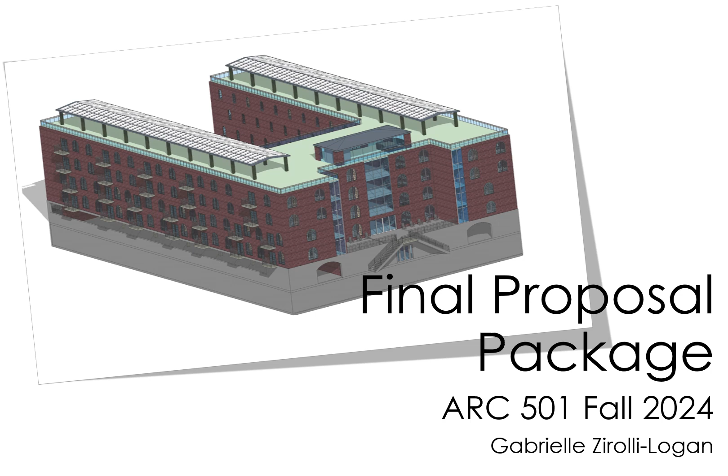For this project, we were tasked with working in groups to design a community of residential buildings in a Los Angeles neighborhood with a focus on affordability and sustainable design. In order to succeed in the design of our community, we first need to learn about the neighborhood and city we would be bringing this community to.

In summary, Los Angeles is the second most populated city in the United States. Its largest industries are oil, manufacturing, and motion pictures. There is a large Latino population in the area. There is a history of inequality and gentrification, and the city is seeing an increase in high-density housing to accommodate growing populations.

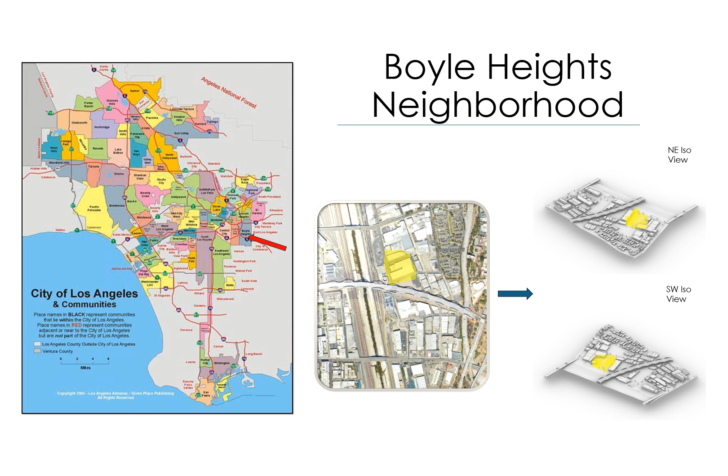Our site is located in the Boyle Heights neighborhood. Boyle Heights is at the far east side of the city, just north of South and Southeast LA. Our site is located along the east side of the Los Angeles River between 4th Street and 7th Street bridges.

With the research that our section conducted, there are some important key takeaways to consider when designing our communities and residential buildings in the Boyle Heights neighborhood. Housing has been and continues to be an issue with affordable housing hard to come by, gentrification still driving locals out of the area, and there is a large homeless population in the area.

But development is often frowned upon by locals as they perceive it to be a threat and it disrupts community functioning. Green building is becoming more important as climate change becomes more of a prominent issue, energy and water costs rise, and as the health of the environment is more valued by the younger generations. Additionally, unity in the neighborhood is lacking, and Boyle Heights does not have much green space.

Keeping these key ideas in our research in mind, some recommendations for moving forward in our designs include repurposing existing buildings so as to cause less disruption to the neighborhood, integrating mixed-use components to balance the need for recreational, commercial, and residential spaces, implementing green building elements and technologies in order to save on energy costs, save water, and contribute positively to the health of the planet, and adding community amenities and shared spaces to foster a feeling of unity, and keeping the locals in mind when it comes to developing, getting their opinions, and respecting their neighborhoods.

I looked at some precedent projects throughout the course and took away some good information and inspiration. The Macallen Building in Boston, Massachusetts is an apartment building that holds a LEED Gold certification for its superior sustainable design.

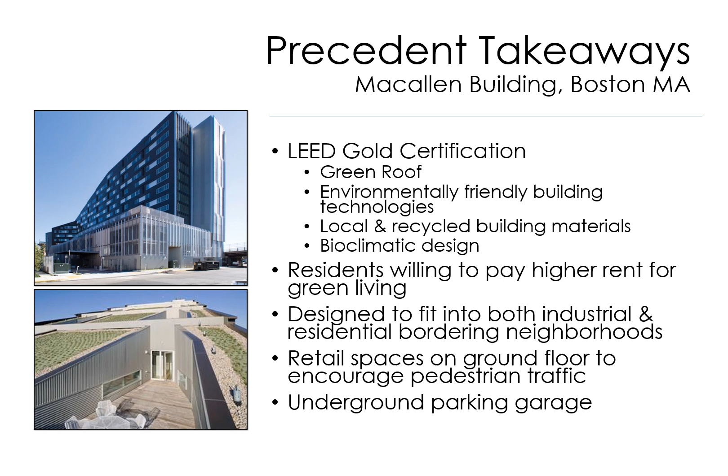The SIX Veteran Disabled Housing in LA has a main focus on affordability and sustainability. The architects let the structural engineer and contractors take the lead on designing in the most cost-effective way. They used passive design strategies like natural ventilation for cooling. Other green aspects included a green roof, solar panels, and low-flow water fixtures. They also prioritize community elements over private areas to encourage socialization.

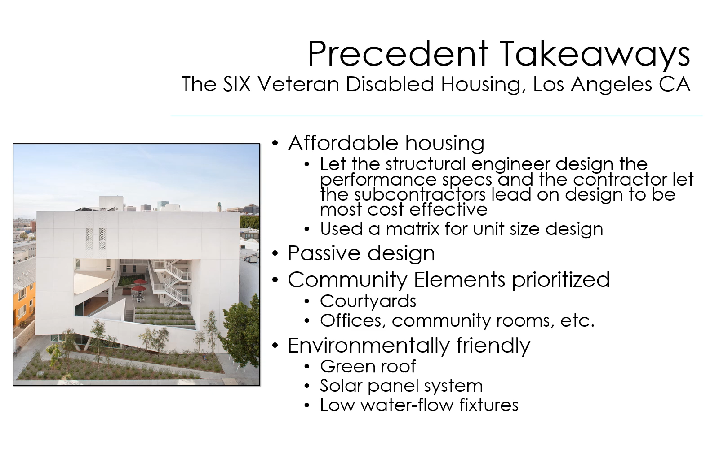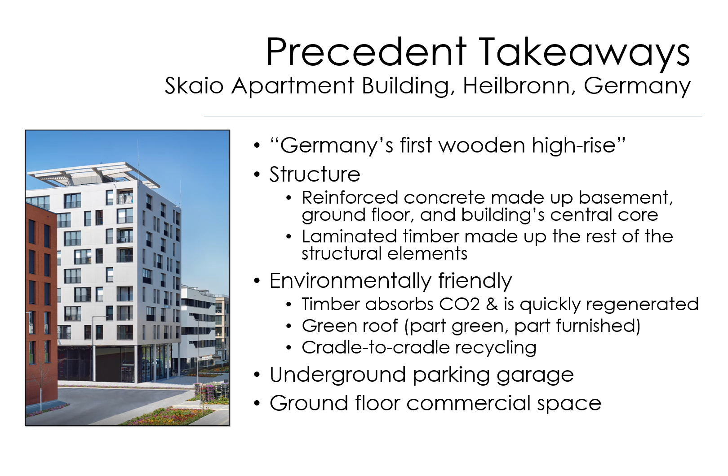The Skaio apartment building in Heilbronn, Germany is an impressive timber structure. It is Germany's first wooden high-rise, with its structure largely made of laminated timber. This also makes the building very environmentally friendly with its ability to absorb CO2. Skaio also has a green roof, underground parking, and ground floor commercial space. You'll see many of these ideas incorporated into mine and the community's design.

Our group chose Site 2 in the Boyle Heights neighborhood, which you can see highlighted here. We chose this site for its access to Viaduct Park to the south and for its size, as we would be adding 5 residential buildings to the site. I have Zone 3 on the site. It is 36,955 square feet, and my plan was to design an apartment building focusing on sustainability and affordability.

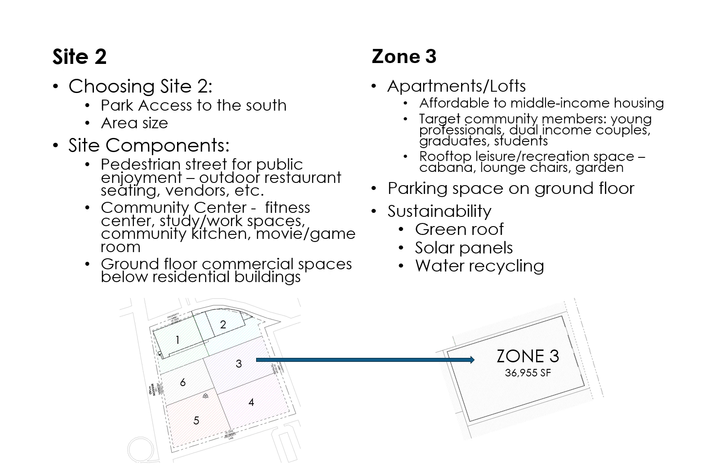Here's our group's master plan for the community, which we named Viaduct Village. The entirety of the site is 5.5 acres, which required 167 units. My building alone has 56 of those units. Here you can see the planned site with our master plan incorporated for context with the surrounding neighborhood.

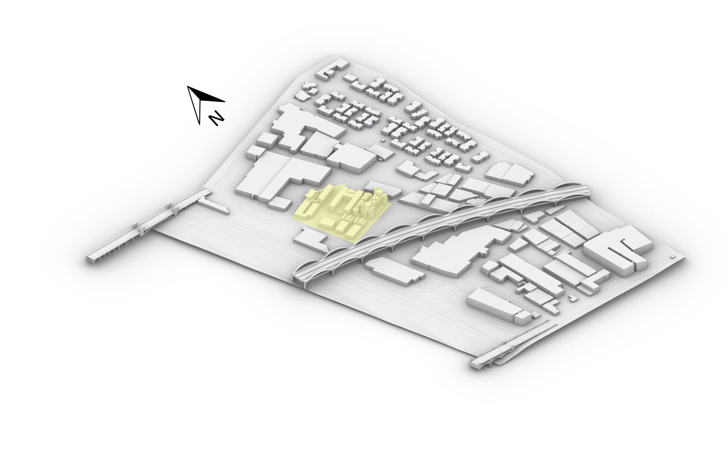The site can be accessed by both pedestrians and vehicles. The secondary street on the east side of the site was previously pedestrian-only and is being converted so that vehicles may access the parking garage on the ground and basement floors of my building. There are 2 pedestrian streets going through the site, which will also be utilized by emergency and service vehicles so that each residential building is accessible.

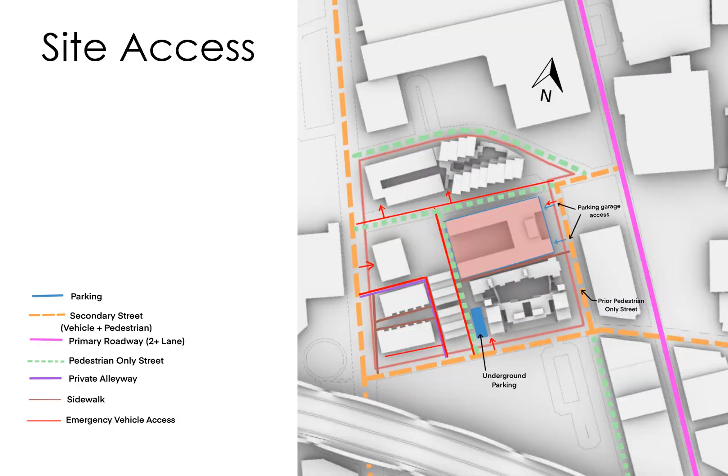Some factors to keep in mind when designing on the site are its proximity to the LA River, the winds from the east and west, and the warm, dry climate.

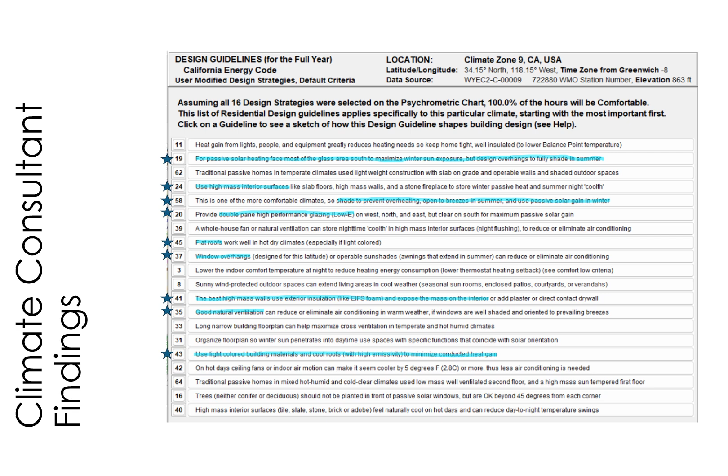I used the Climate Consultant program to further look into the site's ecological factors to consider, and some guidelines the program suggested were southern sun exposure, high mass interior surfaces, shaded areas, double pane low-E windows, flat roofs, natural ventilation, cool roofs, and more.

I went through several massing ideas at the beginning of my design process. I wanted to maximize the amount of units in my zone, incorporate a courtyard for the residents, and keep the design relatively simple in order to keep construction costs down. I ended on this modified H shape.

I think it is a simple but interesting shape and hope to add design interest with building materials and window shapes. I also went back and forth on how to use the bottom floors of my building and settled on a parking garage for both the residents and the public visiting the community.

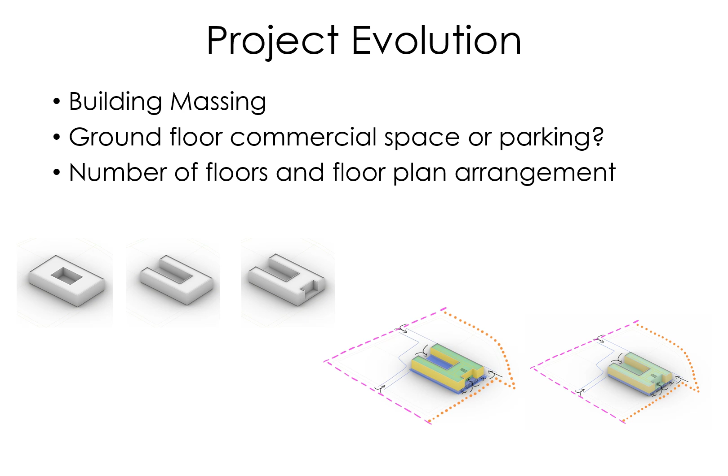I also added floors to increase the number of units and went through several floor plan and unit designs throughout the process. I named my building Urban Eden Residences, sustainably designed, urbanly inspired.

Getting into the layout of the building, I designed a ground floor and basement parking garage. These hold a total of 91 parking spaces. There are 2 pedestrian entrances to the west and a vehicle entrance and exit to the east.

The basement is accessed via 2 elevators and sets of stairs at the northwest and southwest corners, and the ground floor has an additional staircase and cargo elevator at the front of the building to the east. The ground floor also has a storage and mailroom for residents.

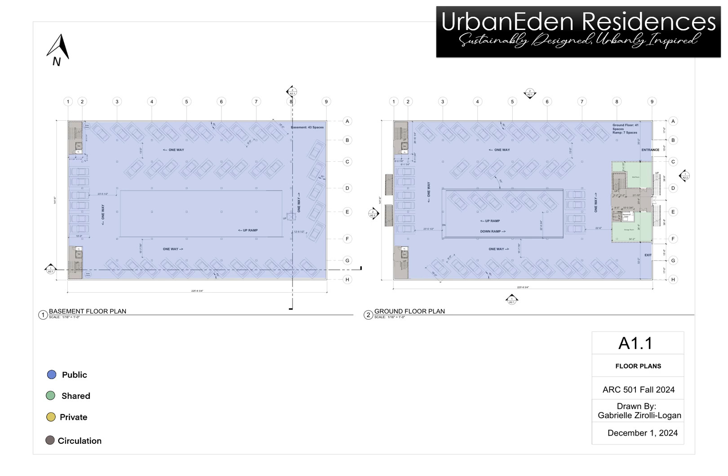Level 1 is accessible via both the interior staircases and elevators, as well as 2 exterior staircases at both the east and west of the building.

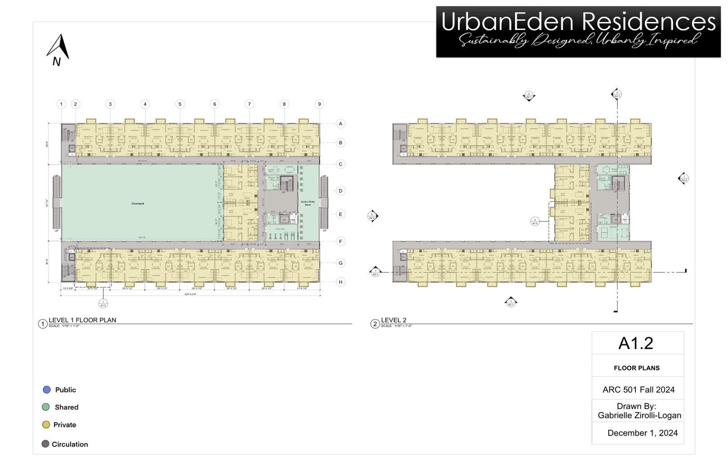The interior floor plans of levels 1 and 2 are identical, with 14 one-bedroom, one-bathroom apartments and 2 two-bedroom, one-bathroom apartments on each level. Each floor also has a men's and women's bathroom, as well as 2 additional common spaces.

Levels 3 and 4 also have identical floor plans, but with 10 two-bedroom, one-bathroom apartments and 2 three-bedroom, two-bathroom apartments each. The core of the building, with the elevator, staircase, restrooms, shared spaces, and 2 two-bedroom apartments, is identical on all 4 residential levels.

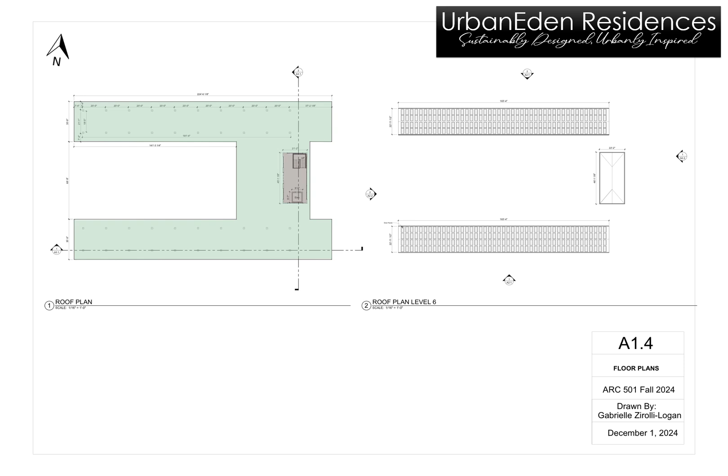The roof is accessed via the core elevator and staircase and is a shared space for residents to lounge, garden, and socialize.

Here are some enlarged plans of the 4 different types of units in the building. Unit Type 1 is a 1-bedroom, 1-bathroom, 926 square foot apartment. Unit Type 2 is a 3-bedroom, 2-bathroom, 1,730 square feet.

Unit Type 3 is a 2-bedroom, 1-bathroom, 1,222 square feet. And Unit Type 4 is a 2-bedroom, 1-bathroom, 1,101 square feet. All unit types have balconies, with the exception of the 2 Type 4s on level 1, which instead have direct access

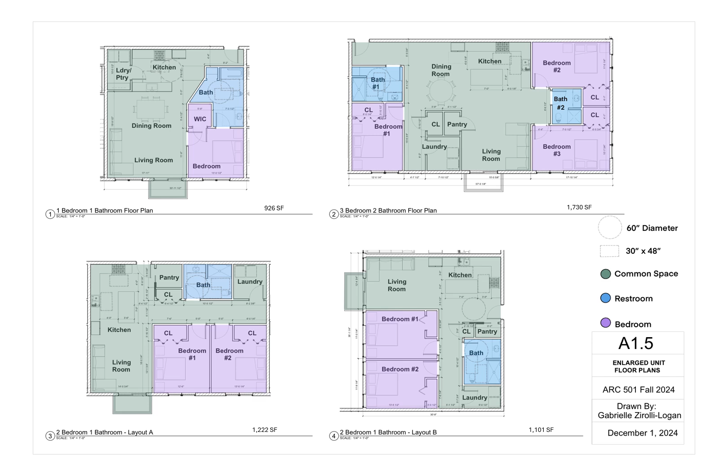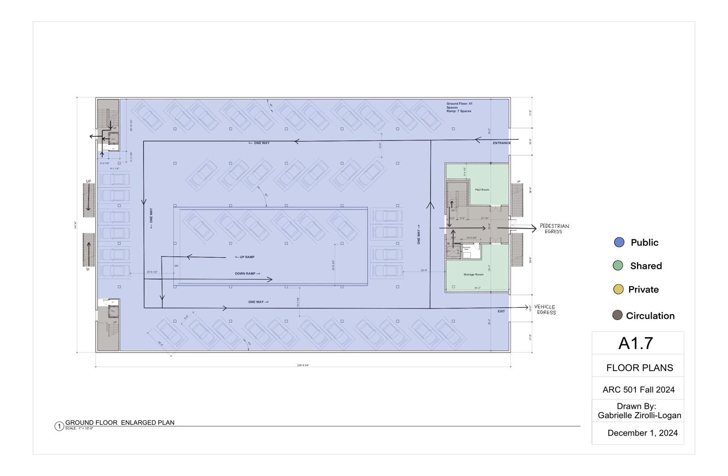Next, I further identified the different unit types on the floor plans. You can see the 1 bedrooms colored in yellow and the Type 4 2 bedrooms in red.

I also identified the egress routes on each floor. Level 1 has 2 exit doors into the courtyard to the west and the main doors on the entry deck to the east. Residents may also travel downward to exit via the ground floor.

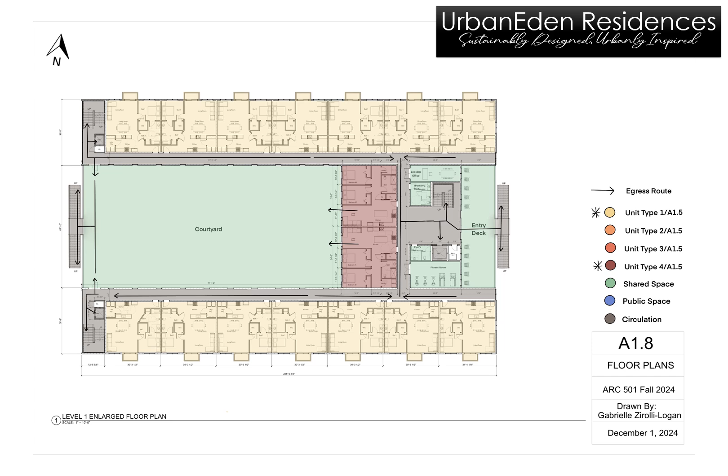The shared spaces on this floor are a leasing office and fitness space, in addition to the 2 restrooms. There are also 3 mechanical closets on each level, shown in white, with vertical shafts for mechanical and electrical system components to access each floor.

Here's level 2, the same floor plan as level 1 with the exception of the exterior access points. The shared spaces on this level are a resident lounge and a game room.

Level 3 has 8 Type 3 units, 2 Type 2 units, and 2 Type 4 units. The shared spaces on this level are a work-study space and a media room.

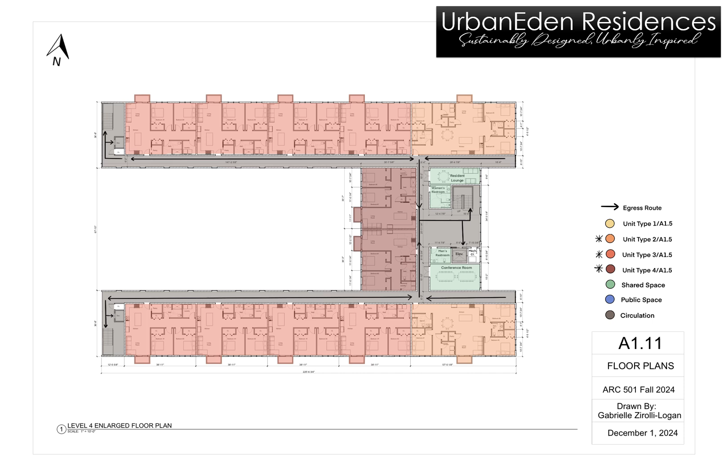Here are some elevation drawings of the building.

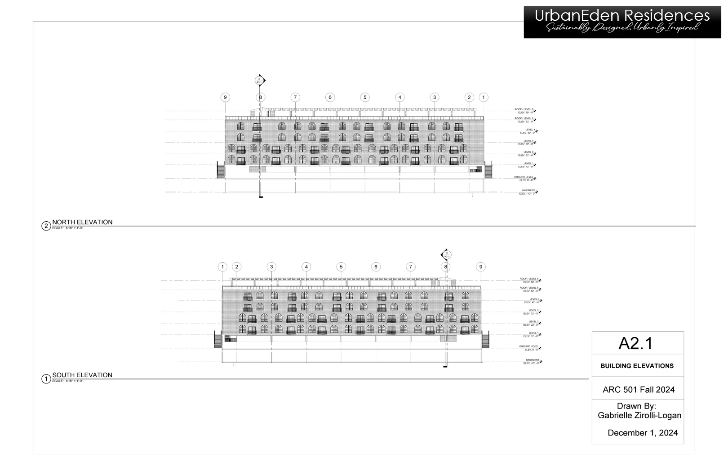Next is a southeast isometric view of the building design, and a northwest isometric view.

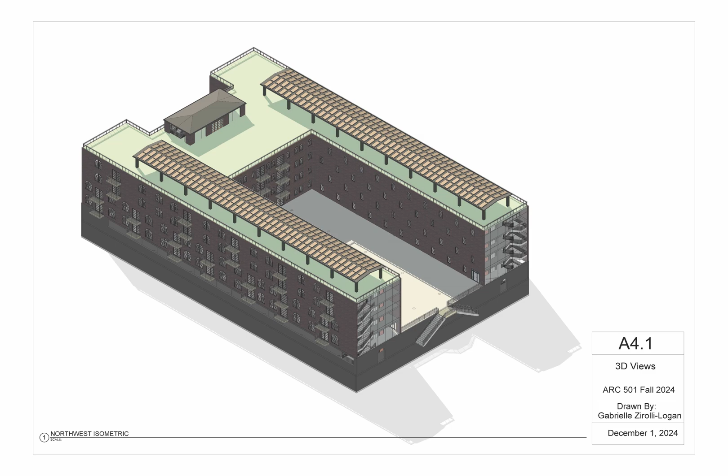Some sustainable and passive design strategies that I incorporated into my design include operable unit windows for natural ventilation, and all windows will be double glazed and thermally insulated.

I used high mass brick and concrete interior surfaces, which help decrease day to night temperature swings. Using these materials as the finished design materials will also help keep costs down.

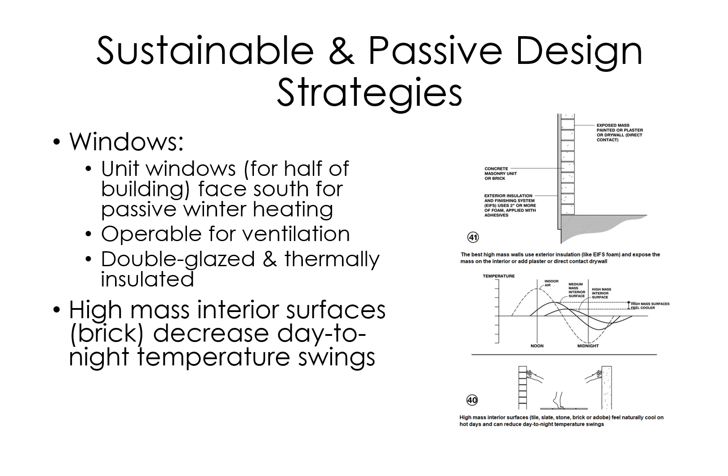I also added solar panels on top of the shade structures on the roof, and I made a green roof that will collect stormwater for use in irrigation and other non-potable water needs. The green roof also is insulating, and it decreases the urban heat island effect.

In construction of the building, I plan to use as much recycled and locally sourced materials as possible.

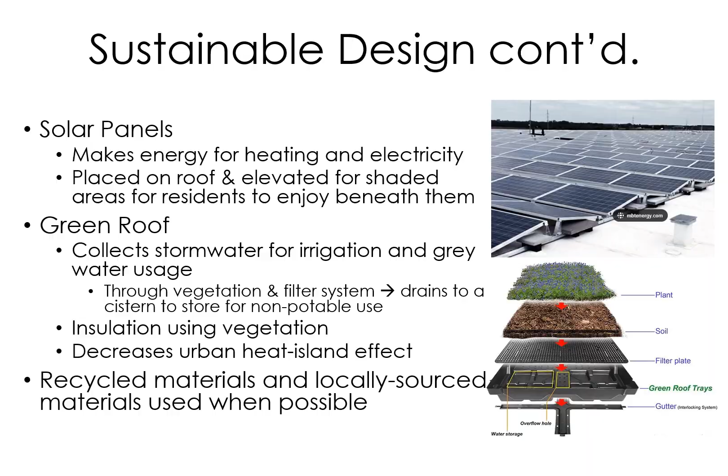Here's a visual of some of the sustainable design elements. You can see the shade structures on the roof with the solar panels on them. I added gutters to these, as well as the circulation structure, to funnel rainwater to the green roof.

The green roof absorbs water through the vegetation layer, through a filter, and into a collection pan, which then drains down to the basement, where there are 2 cisterns to store the water.

The roof will also encourage community socialization with lounge areas, a barbecue area, and 2 resident gardens.

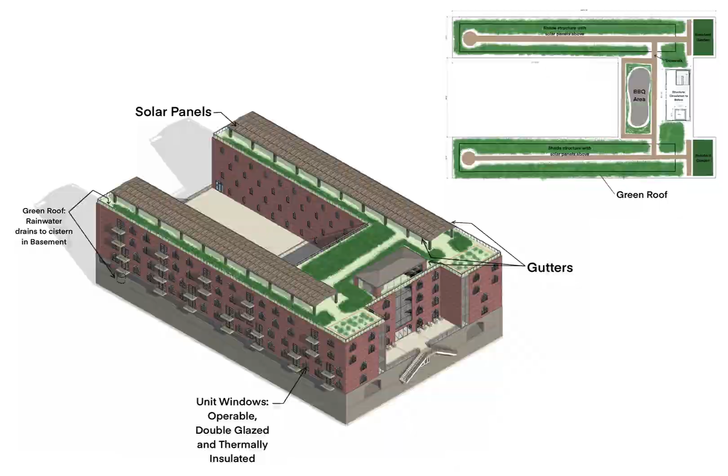For the structural design, I am using concrete as necessary for the ground and basement level parking garages. Concrete and masonry will be used for structural walls and columns, and mass timber will be used for floor and ceiling joists and beams in the residential levels.

I am leaving all of these materials exposed to save on costs and to achieve a visually industrial design.

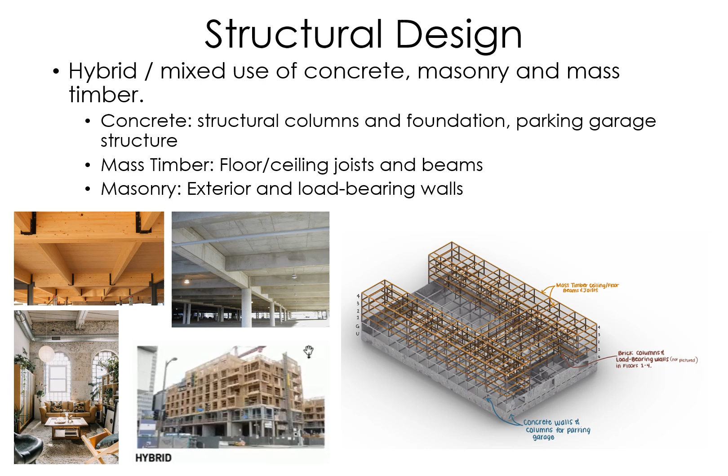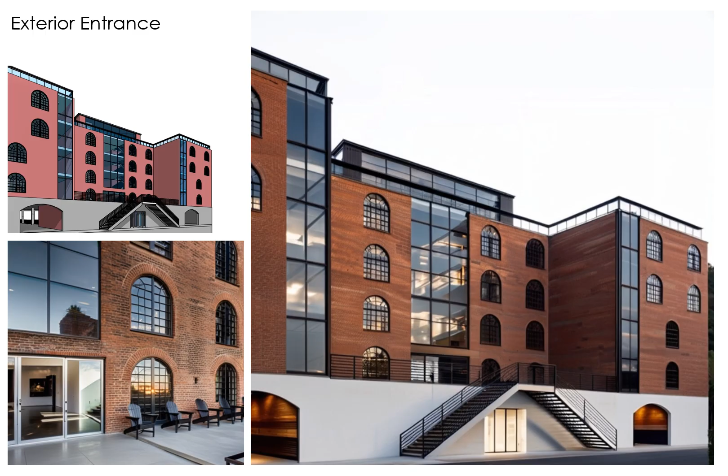Last, I wanted to share some rendered perspective views of my building. I wanted to incorporate brick and glass curtain walls for an industrial design that fits into the surrounding neighborhood, yet still looks new and clean and modern.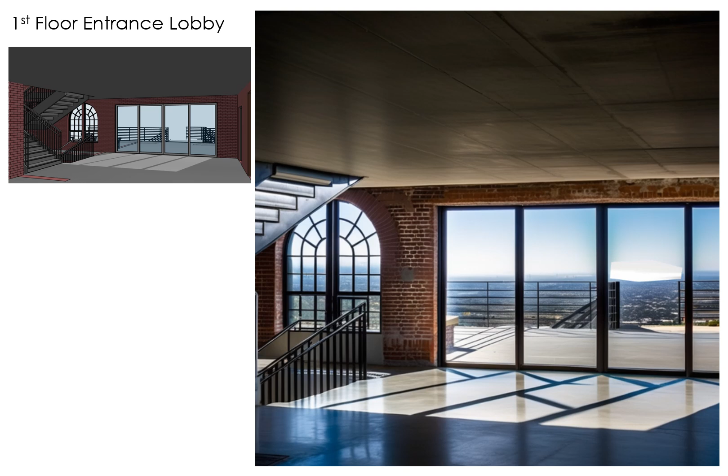Next is a rendered view of the center courtyard, where there will be several seating options for residents to relax and gather.

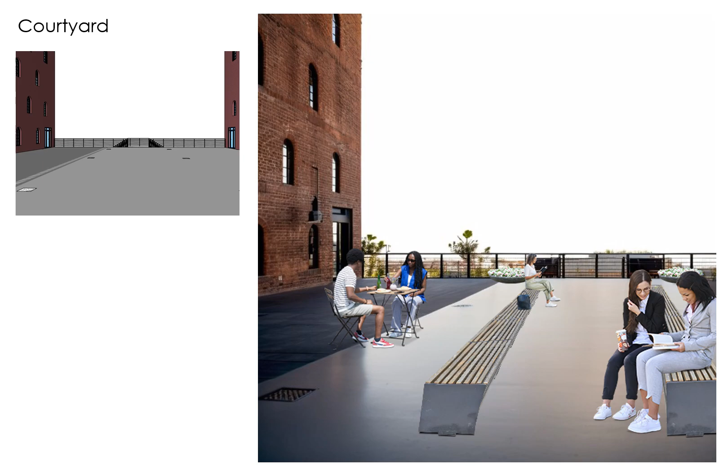Thank you for viewing my presentation on the Urban Eden residences in the new Viaduct Village community in Boyle Heights, Los Angeles.